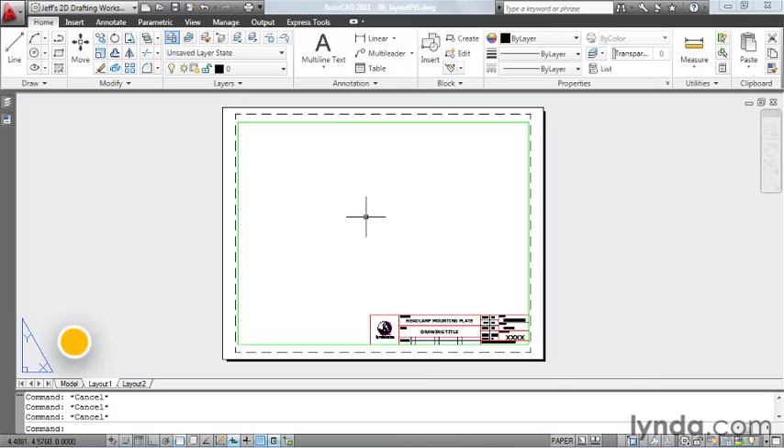Now that we've added a title block to our layout, we're ready to finalize our settings and create a viewport such that we can see our part and set it to a measurable scale.

First, let's take a look at the geometry in this layout. Notice the geometry is displaying using the layer colors. Wouldn't it be nice if our layout displayed just like a plot preview? Let me show you how we can do that.

I'm going to right-click on the layout name, then select Page Setup Manager, then Modify. We've already taken care of these plot settings ahead of time. Let's take a look at the plot style table.

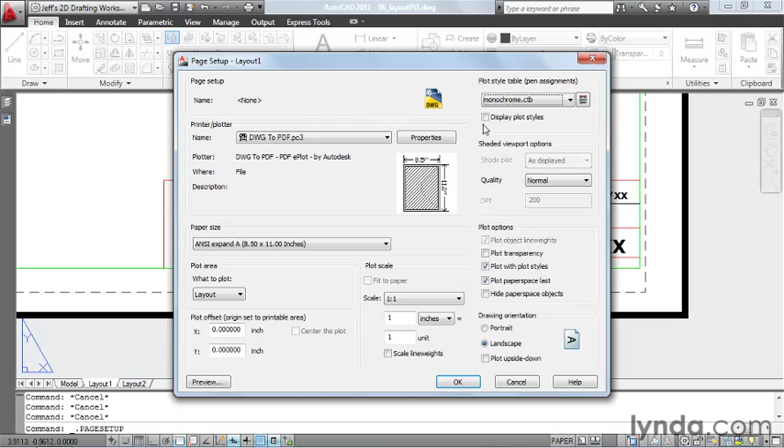I'll open up this menu and select the monochrome pens. Notice that since I'm using a layout, I have the option of displaying the plot styles. I'll turn this feature on, click OK, and close.

Now my geometry is displaying using the colors in the plot style table. We can take this concept even one step further. Maybe I'd like to see my line weights as well.

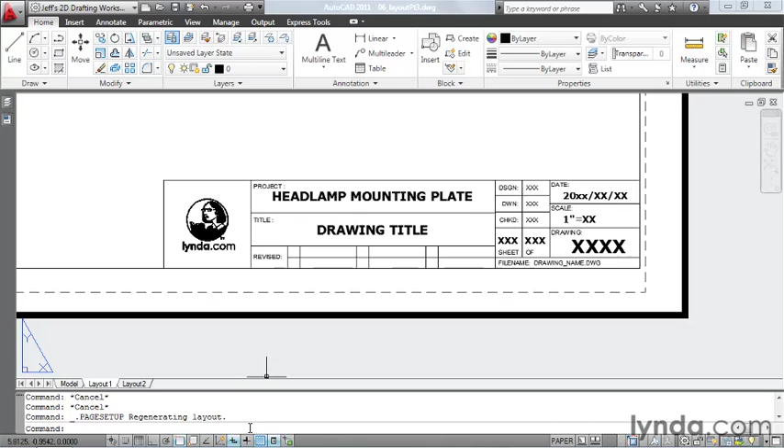I can do that by adjusting a mode setting in the status bar. I'm going to come down and click this toggle, which controls the display of the line weights. When I turn this on, we can see the line weights in the drawing, and now I am truly able to work in a plot preview style mode.

At this point, you may be asking yourself, where is our part in relation to this layout tab? Let's take a look. I'm going to come down to the lower left and click the Model tab. This returns me to Model Space, where my part geometry is located.

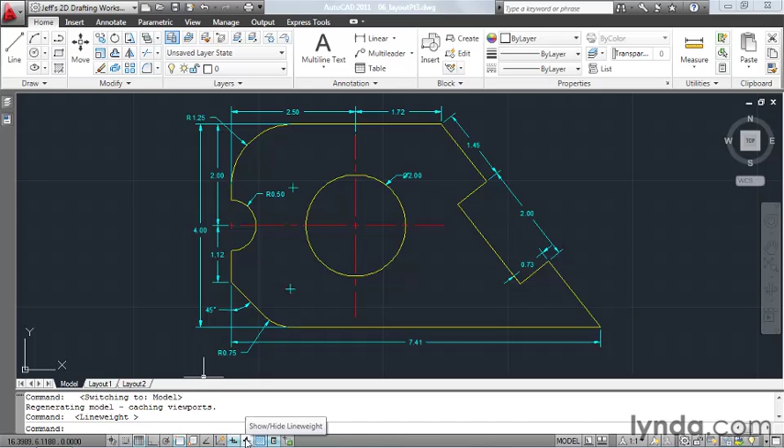Notice Model Space looks a little different now because our line weight toggle is turned on. If you find the display of the line weights to be a problem, you can always turn them back off. The line weights will plot just fine whether this toggle is turned on or not. I'm going to leave mine on, and then I'll return to the Layout tab.

Layouts sit on top of Model Space, so if I want to see my part, I need to cut a hole in this layout. This hole is called a viewport, and if I'm going to create a viewport, I need to put it on a layer of its own.

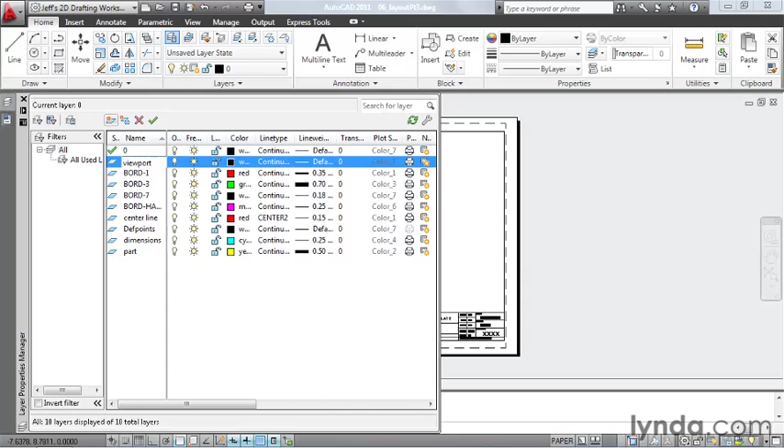So I'm going to open up the Layer Properties Manager and click the new icon. I'll call my layer Viewport, then click the green check to set this layer current, and return to the drawing. To create the viewport, I'll click the View tab, and the tool I'm looking for is down here in the Viewports panel.

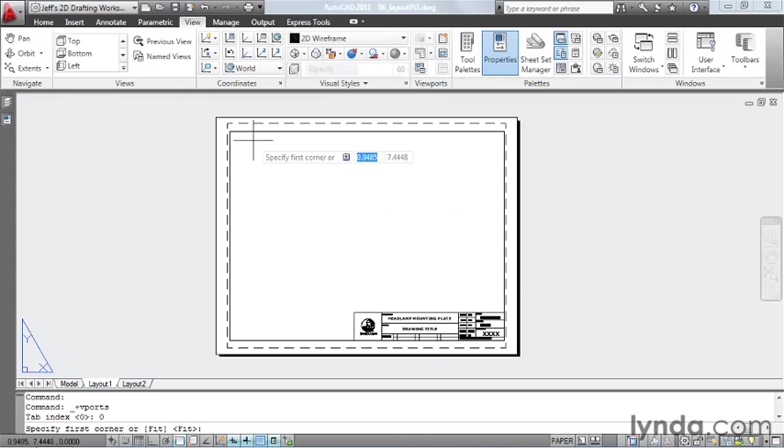Launching this command is essentially 3 clicks. I'm going to click New, then Single, then OK. Now I'll pick 2 points to define the rectangular shape of my viewport. I'm going to select the endpoint here and the endpoint here.

Notice we can now see the part through this viewport. A viewport is a lot like a window into model space. Watch this: if my cursor is inside the viewport and I double-click, AutoCAD gives me access to model space through the window. From here, I can pan, zoom, I can even work through this viewport. It's a lot like reaching your hand through a window.

In fact, we'll adjust the plotted scale of this geometry by adjusting the zoom factor. Now, I don't have to do that manually.

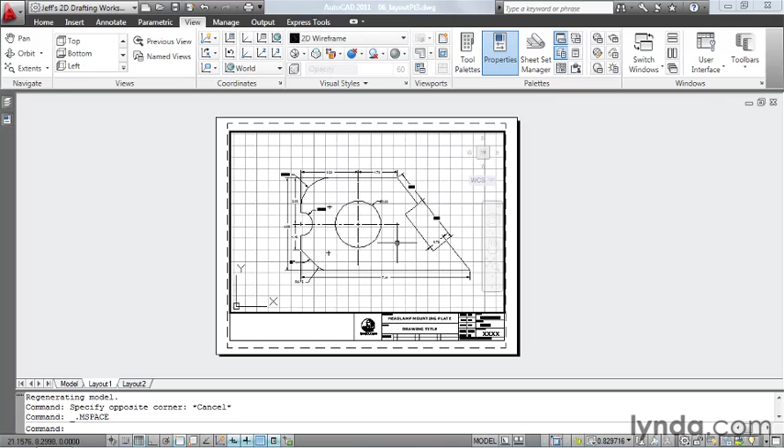Once I'm in the viewport, I'll come down to the Viewport Scale menu and set the scale from here. I have several standard engineering and mechanical scales at the top of the menu, and architectural scales down at the bottom. Let's see if this drawing will fit in the viewport at a scale of 1:1. It looks like that will work nicely.

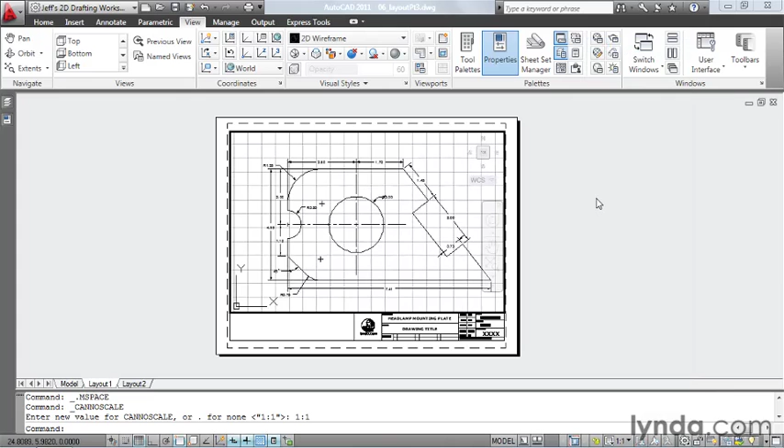I'm going to pan this over and center it a little better in the viewport. Once you finalize your viewport, it's a good idea to come down and click this padlock to lock it. Otherwise, if you accidentally roll your scroll wheel, you'll change the scale of the viewport, and you might think you could roll the wheel back to fix this. Unfortunately, it never works. The only way to correct the scale is to come back to the Viewport Scale menu and reselect the scale from this list.

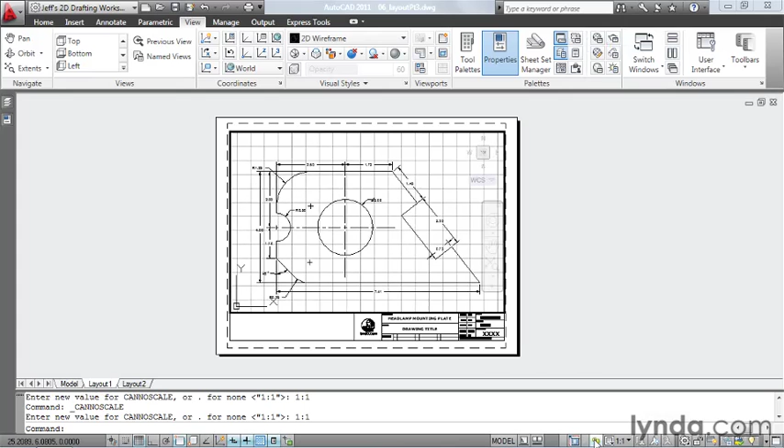Now that I've set my scale, I'll come down and click this padlock to lock it. From now on, if I pan or zoom in the viewport, AutoCAD is going to pan and zoom the entire layout. If I'd like to jump out of the viewport, I'll move my cursor outside the viewport boundary and double-click. Now my cursor is back on the Layout tab, and I have access to all of the layout geometry and objects.

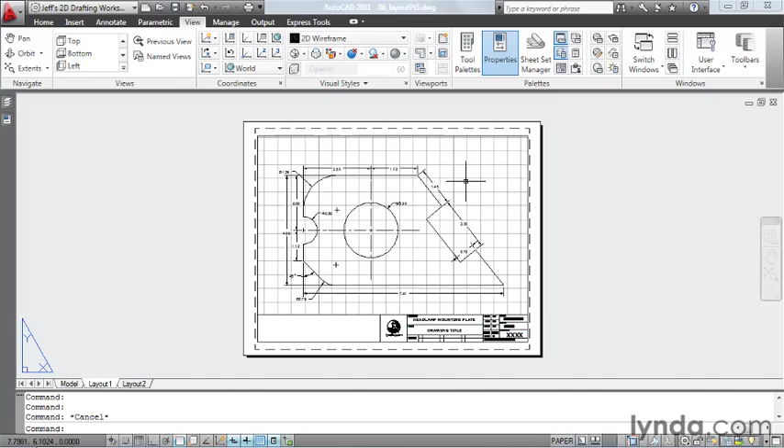I'd like to do one more thing. In keeping with my plot preview analogy, I'd like to turn off this grid. This grid is coming from Model Space, and it really doesn't benefit me that much on the Layout tab, so I'd like to turn it off.

To do that, I'll double-click to jump into the viewport, then come down to the status bar and click the grid toggle to turn it off. It will be turned off in this viewport only. When I'm finished, I'll double-click outside the viewport boundary to jump out.

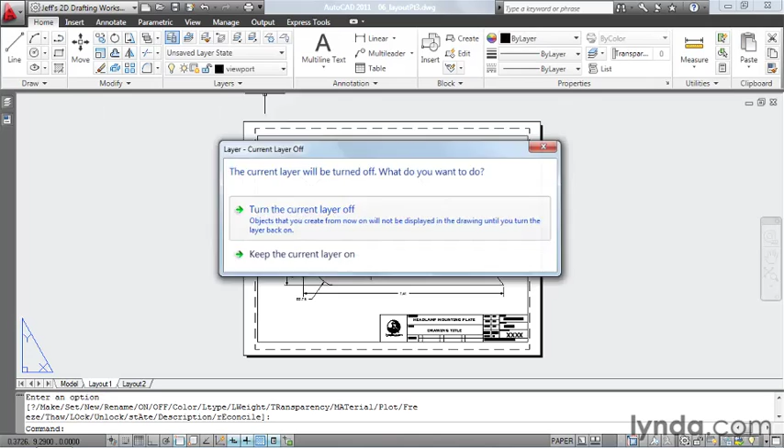Now, remember when I created my viewport, I put it on a layer of its own. You may be wondering why that's necessary. Let's take a look. I'll go to the Home tab, and if I turn off the viewport layer, notice that the rectangle disappears and I don't have to worry about this viewport showing up on my plots. That's why it's a good idea to put it on a layer of its own.

Now I'd like to do one more thing. I'd like to rename this layout. Layout 1 is kind of generic. To change the name, I'll double click on it and call this Final Design, then press Enter.

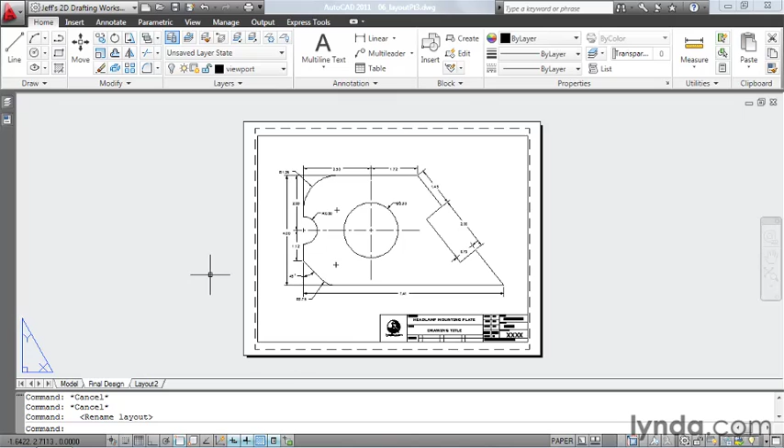When the time comes to plot this layout, remember that all of the plot settings have been taken care of ahead of time. All I have to do to send this to my printer is click Plot and OK. Since I'm plotting this to a PDF, I have to give it a file name. I'm saving this to my desktop, and I'll call the file Final Design, and click Save.

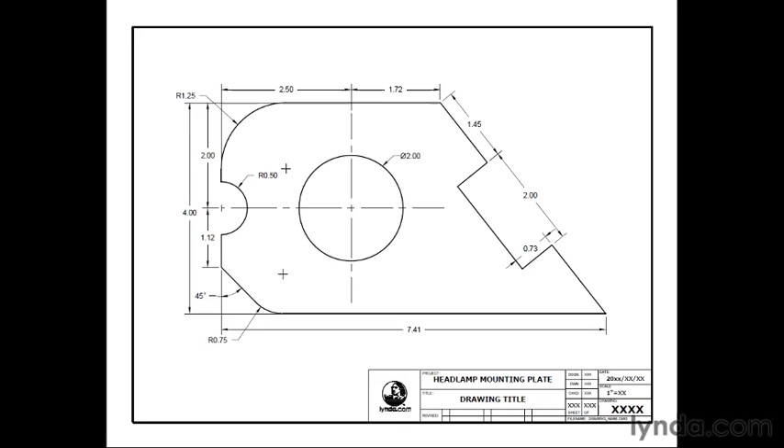On my screen is an example of the final plot. Layouts are the most powerful way of creating plots in AutoCAD. Their benefits even go beyond the viewports, plot preview, and naming features we've seen here. If we can incorporate layouts into our workflow, we've taken the first step towards using even more powerful features like sheet sets, page setups, and publishing.